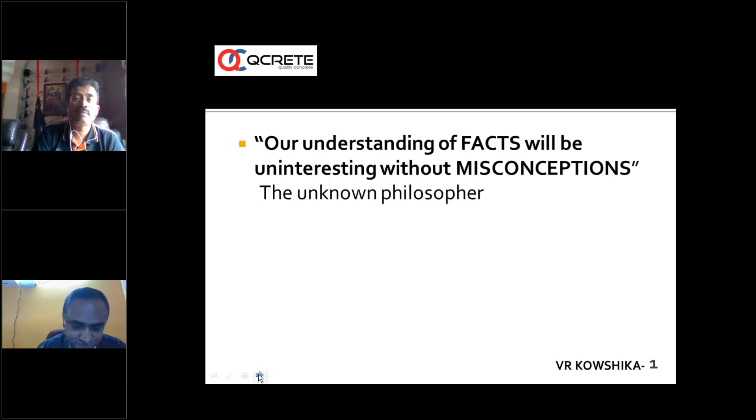Commercial ready-mix concrete started booming in India from 1995 onwards, and some multinational companies came to India also during that period. Even though a German architect patented this ready-mix concrete technology around 1903, almost more than 100 years ago, ready-mix started booming in the UK and Australia starting from the 1930s and 1940s. Still, almost after a century, we have a lot of misconceptions.

And this webinar or lecture is an attempt to talk about those misconceptions and draw the attention of customers and civil engineers who are associated with concrete to the facts.

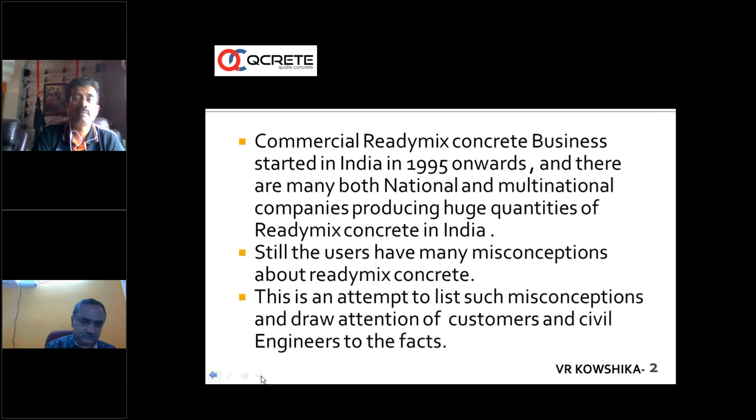So when I was in RMC India around 1999, 2000, at that time also we had all these misconceptions. Unfortunately, many times we hear similar and the same misconceptions, once in a while, before either selection of ready-mix concrete or when a project comes up, we get into these discussions. Sometimes I feel it is unfortunate because a lot of dissemination of knowledge and awareness has been happening through various forums, but still we have to talk again and again on the same subject because the application of the facts and various methodologies which we have described for the last 20 years is still yet to be seen on ground in many cases.

So one of the misconceptions is: I was using conventional concrete and I used to get better strength. This is one of the misconceptions actually.

About 3 weeks ago, there was a call from Mumbai, and the caller identified himself as a 73-year-old man and a professional. He said, Kowshika, what are you doing? I said, I'm working as technical head for this company, Q-Crete Ready-Mix India Limited. Then he said, no, none of the companies in India have done good concrete. They don't supply good concrete, they fall short of quality in many places. I don't believe all this, he said.

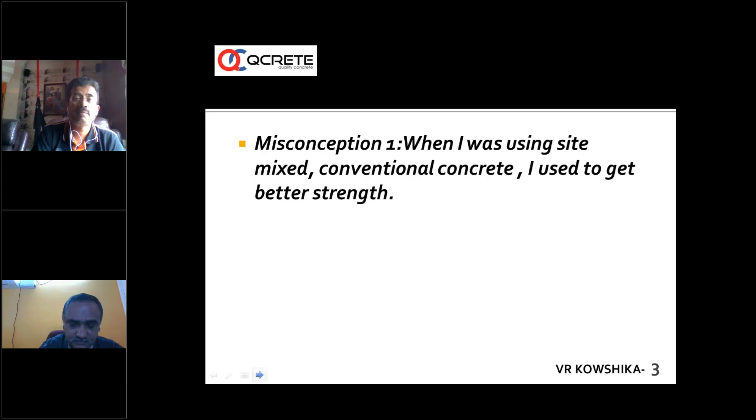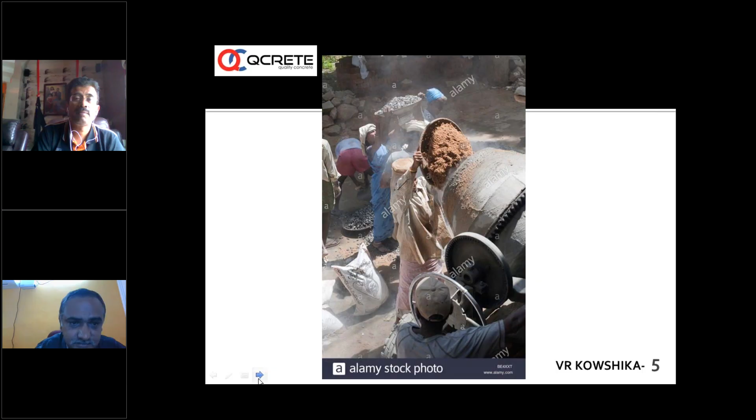The era of site mixed concrete is getting lesser and lesser, even though, as Dr. Manjunath mentioned, there is no proper conversion like in other countries, where about 60 to 70% of cement produced goes into the ready-mix industries, and even plasters and other things are all pre-packed and pre-produced, with assurance coming to the customers. So there is not much site mixing, whether it is ready mix or mortars or whatever.

So engineers and concrete buyers have found ready mix concrete more convenient than site mixed concrete, simply because of the speed at which concrete structures can be built and finished using ready mix concrete. This is the age of speed - everybody is in a race, whether in education, personal life, or whatever way, everybody is racing to do things faster.

In construction too, the speed at which buildings are being built has phenomenally increased. We hear stories of buildings built in China in 24 hours - a 3 or 4 story building, things like that. All this is made possible only with the help of ready-mix concrete, and there is no substitute at this moment that can really match this speed.

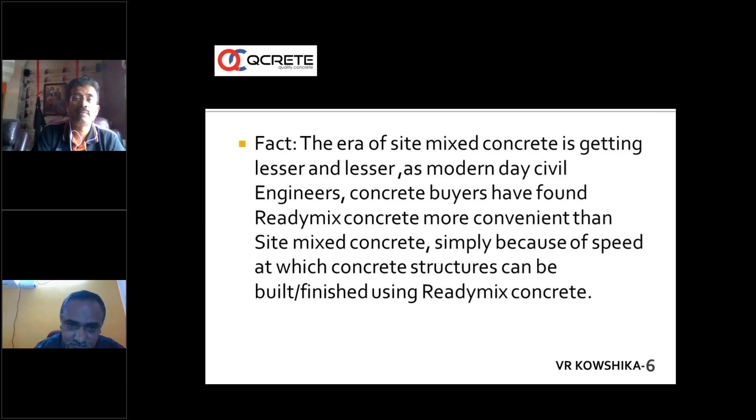Earlier, conventional mixes used to have more cement than required. For example, we used to have M25 at 1:1.5:3 mix, which resulted in approximately 400 kg per cubic meter of cement.

When we were selling admixtures around 91 to 94, it was our primary job to talk to customers about cement saving, how we can save cement by using admixtures. At that time we used to make trials at say 1:1.5:3, which is about 400 kg cement, and bring it down to maybe 340 or 350. That is how we used to establish the cement savings.

At that point of time, PWD, CPWD, and all these agencies used to have specifications like 1.5:3, 1:2:4, things like that. From that point, we have moved a lot, thanks to the ready-mix concrete industry and the booming up of both corporate and non-corporate players.

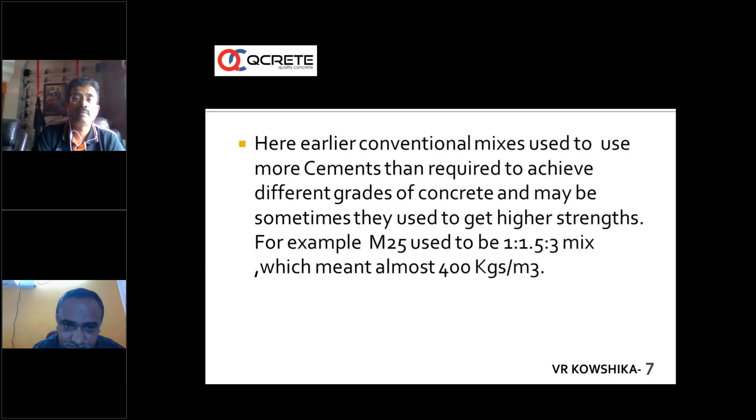Sometimes when the water cement ratio was used correctly - in site mix there is no much control on water cement ratio, it is left to the whims and fancies of the masons adding water - accidentally, by God's grace, when the water cement ratio became okay, even volumetric concrete used to yield higher strengths.

So that was taken as a benchmark, and some people used to say no, we have to consider the importance of material properties like silt content, things like that.

Ultimately, if the concrete quality - all the parameters, strength and slump - came out okay, it was purely probably because some experienced mason was operating the small mixer and adding the water rightly, and the cement content used was more. That is how they used to achieve better quality through site mix.

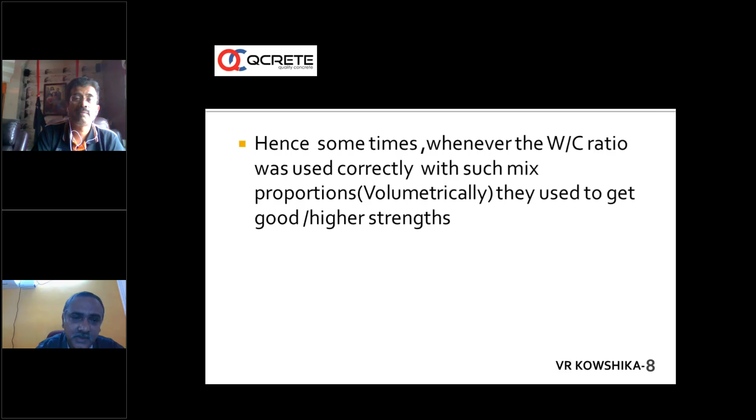Modern cement and mineral admixtures are used in computer-controlled batching plants, making it possible to produce M25 grade concrete today at 320 kg cementitious content, not only cement. Sometimes we use GGBS or fly ash in this mix, and the results give what is required - that strength and properties of concrete. Ready-mix concrete companies give just what is required, what strength and properties are needed.

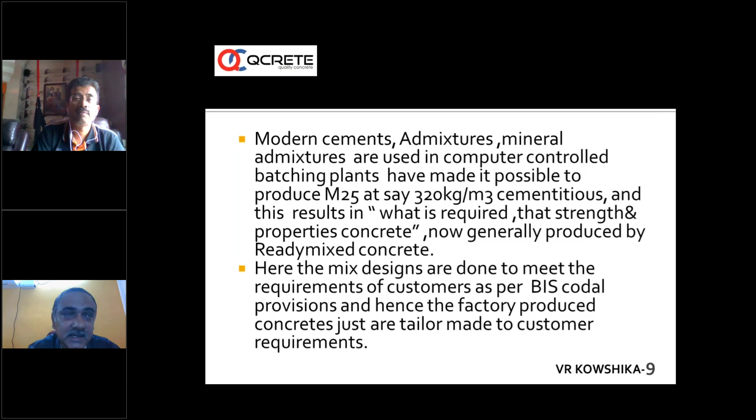Mix designs are done to meet customer requirements as per BIS codal provisions, and hence factory-produced concretes are tailor-made to customer requirements. Customers come up with different requirements - somebody wants early strength, somebody wants 3-day strength, somebody wants different flow properties. Somebody wants SCC, somebody wants highly flowable concrete with conventional admixtures. All these are made possible with automated batching plants where recipes are fed and mix designs are done prior to production, with a greater degree of control exercised.

In short, ready-mix concrete has brought in better quality of concrete and speed of construction - very fast construction, incomparable at many points to site mix concrete. There are no storage hassles, and no throwing around of materials on the road.

In our country, we are fortunate to be here - we can do whatever we want, throw wherever we want, and nobody questions us. But in other countries, throwing up or storing aggregates on the road, stopping traffic with mixers on the road - all this is not allowed. Spilling of either concrete or aggregates on the road is punishable in other countries.

Hence ready-mix concrete is a must in many countries. There's less labor requirement, less wastage of materials, and better life cycle cost of construction because we are enhancing durability by usage of alternative cementitious systems. It's also eco-friendly - we are reducing usage of OPC, incorporating other materials, and hence the overall concrete becomes greener.

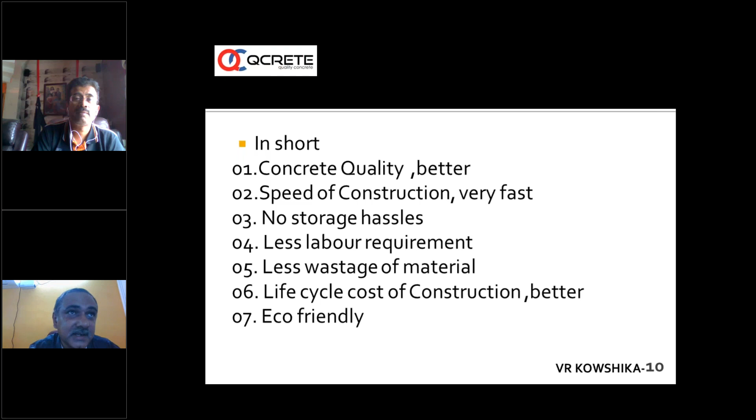So ready-mix concrete as a whole has shifted from larger usage of older kinds of cement - Portland OPC cement - to cementitious systems, where the entire concrete has been pushed to the level of greener and eco-friendly concrete, which cannot be achieved by site mixes.

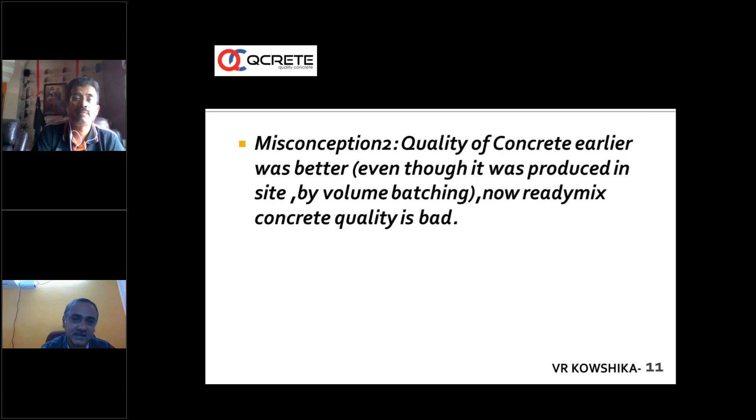The second misconception is that quality of concrete earlier was better. This is an extension of the first misconception - the statement is very subjective. Earlier, site mixed concrete many times had no control of water cement ratio, which we discussed - most importantly, the deciding factor of strength and durability. Water cement ratio is the key, we keep on talking about this.

Also, there was no quality assurance when we were doing site mix. Here in ready-mix concrete, the RMCMA Association, along with Quality Council of India, has come up with third-party audits, with auditors working around the country who certify plants for their capability to produce concrete effectively, complying with the requirements of IS 4926. This certification is given by third-party agencies for ready-mix companies who go through the checklist and maintain all quality management systems in a religious way. That kind of assurance you cannot expect in a site mix situation.

And here is the big difference - any ready-mix company gives the product with complete quality assurance, and many companies, as Dr. Manjunath mentioned, have gone through this process of complete third-party audit. We are certified to produce good quality concrete as per the requirements of IS 4926.

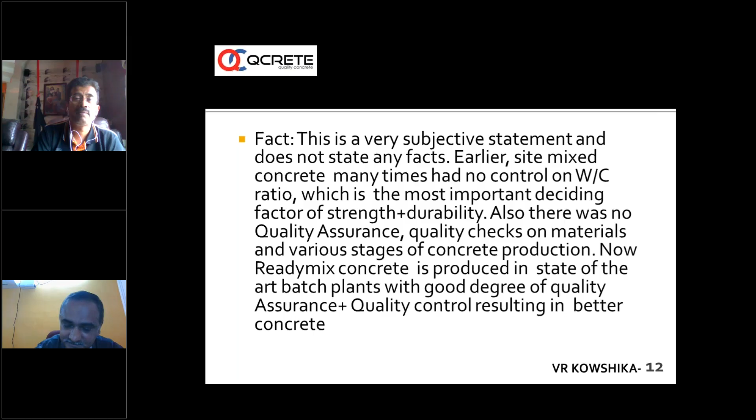Many times, concrete quality suffers or becomes inferior due to inappropriate practices in transporting, placing, finishing, and curing - mostly due to lack of awareness of QA/QC aspects of ready-mix concrete and lack of supervision at sites, even when a good degree of QA/QC aspects are exercised at the production point.

It is not only the producer who is responsible - which is again a misconception. A producer can give the best concrete, but afterwards, other operations in the chain - until delivery and until the concrete is finished - a lot of things can happen.

When we met a good, reputed builder in Bangalore about two months ago and started talking about ready-mix concrete and our company, he said that we can produce good concrete, but what happens afterwards - till the pour starts and after the pouring is over - is 66% his responsibility. He himself told us it is 66%.

33% is your job, 66% is our job, because a lot of things can happen after the concrete leaves the plant and reaches and then gets placed and finished.

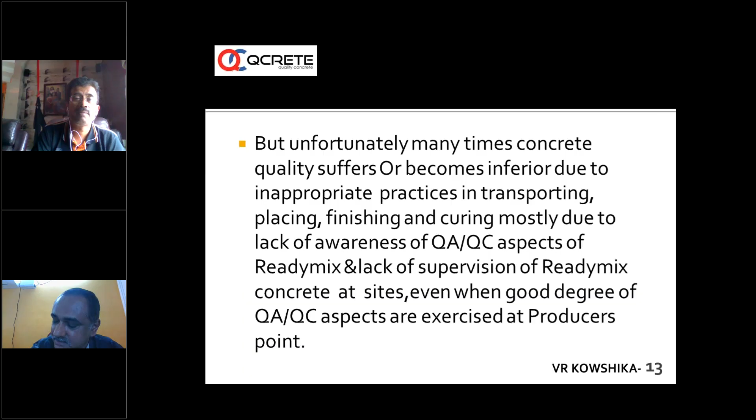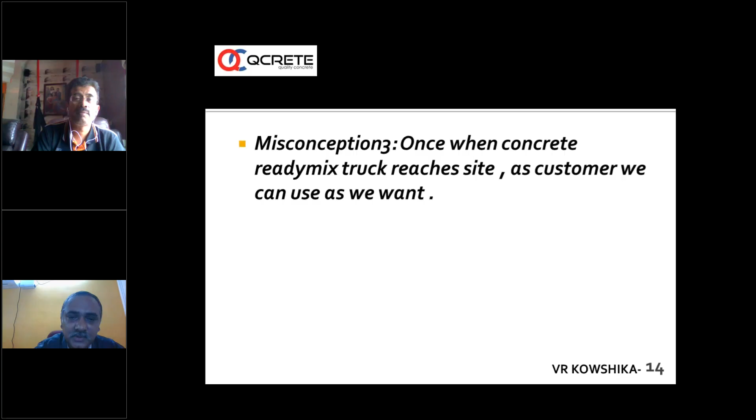The other misconception is that once the concrete truck reaches the site, as a customer, we can use it as we want. Yes, the customer pays for the concrete, but that doesn't mean he can use it as he wants. Before the ready-mix truck reaches site, all preparations must be completed to receive and place the concrete in the intended structures. IS 4926 specifically says that the concrete, once produced, has to be used within 2 hours.

Unless the concrete is produced in winter conditions, or unless it is mixed with superplasticizer or retarder, or a type G admixture which is a superplasticizing and retarding admixture, otherwise you have to use the concrete within 2 hours.

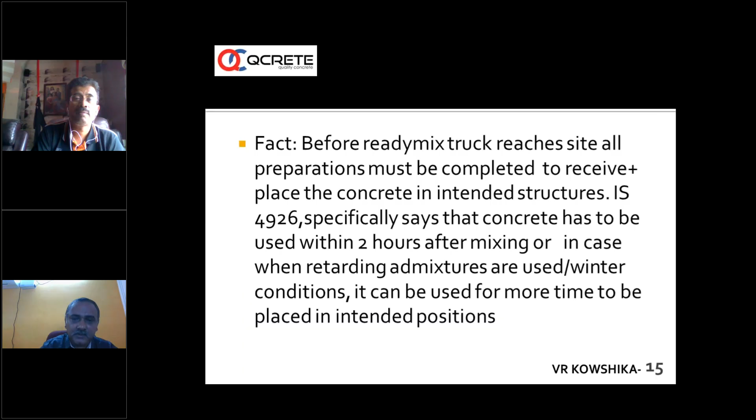So why this particular point has been raised is that quality is a function of time. Quality is a function of time. We can see this with any PCE-based admixture, which is very popularly used now throughout India.

It depends upon so many other external factors like ambient temperature. So it doesn't mean that once the truck reaches the site at 120 mm, 130 mm, or 150 mm, it has the same slump forever. As time passes, within probably 1.5 hours, it will reach a situation where it may become unpumpable.

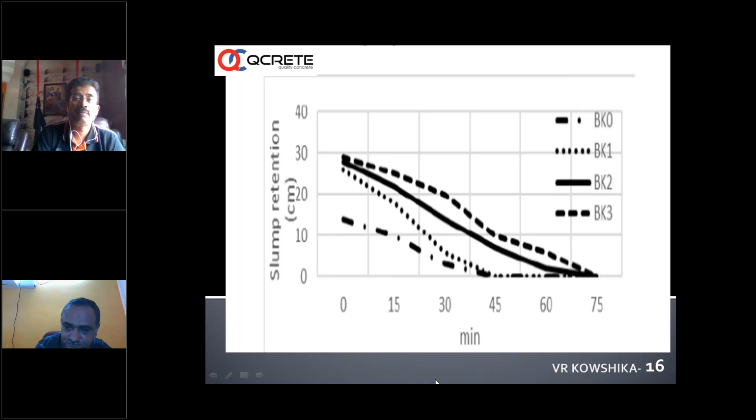So we need to understand that once the truck reaches the site, let us say the ready-mix concrete company has supplied the concrete at the right slump to the site. The responsibility is to use it as quickly as possible. It is the responsibility of the customer to use the ready-mix concrete as quickly as possible, generally not more than 3 to 4 hours maximum, when the concrete includes superplasticizer cum retarder.

Typically, most ready-mix companies use ASTM C494 type G admixture, unless there is clear data showing that with some special admixture methods, concrete slump is maintained for 4 to 5 hours. There was a situation where some trials were done using a strong, high-end PCE-based admixture at a good dosage, where the slump was retained for 4 to 5 hours. This gives an open time of 4 to 5 hours, where after 4.5 to 5 hours we get a slump of about 120 to 130 mm.

So this is a special case. In such special cases, if you want to implement this on site, there should be proper data. A lot of trials have to be done, and then concrete can be used for 4 to 5 hours. Otherwise, we have to limit the usage of concrete, especially for higher grades starting from 30, 35, 40 onwards. It has to be used as early as possible, otherwise the concrete properties become a question mark.

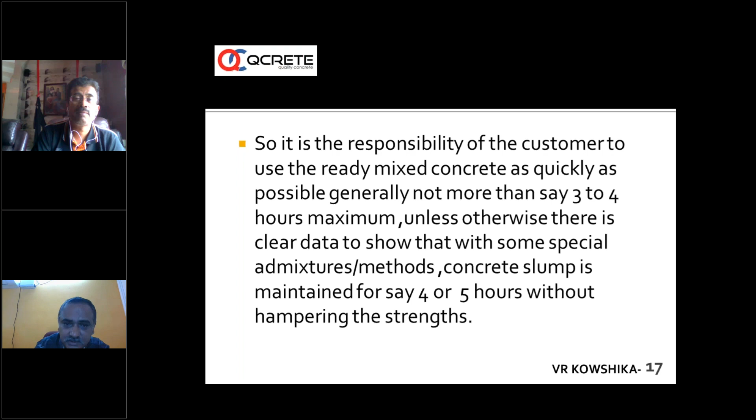What we do many times is try to add admixture on site to boost the slump, which is allowed in IS 4926. Sometimes what happens is the labor or supervisors at site, in the absence of engineers, add water on site, which has to be clearly avoided. In other countries, when I was working with my boss, Marcus Ravensburger, in RMC India, around the year 2000, he used to tell me that in countries like UK, addition of water is allowed at 6 liters per cubic meter to boost or rejuvenate the slump. But we took a decision here that we will not allow addition of water on site because it is uncontrollable and difficult to manage on many sites. So we decided only admixture will be used to rejuvenate the slump.

So boosting the slump on site with a small dosage of admixture is allowed as per IS 4926. A lot of literature and trials have been done around the world supporting this. But there is a misconception - some people don't want to allow addition of admixture on site, and they say the ready-mix company has to supply an exact slump to the site and will not allow any lower slump on site.

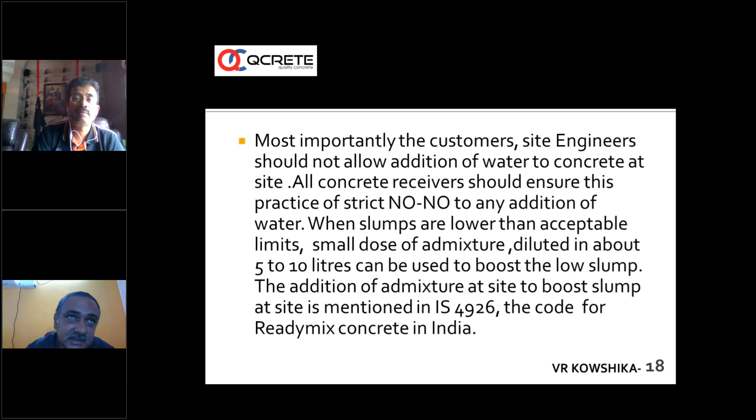As a ready mix company, we do pre-pour inspection and pre-pour site meetings. Any last minute changes, the customer has to inform in advance to postpone the pour - once the truck reaches, he cannot say he is not ready. As per IS 4926, once the truck reaches the site, 30 minutes is allowed for the customer to start pouring the concrete. If beyond 30 minutes the site is not prepared, it is the responsibility of the customer. So customers must be aware of this and there should be 100% preparedness.

I also want to bring attention to the important graph depicting water cement ratio versus strength. When a ready mix company brings concrete - say M50 or M40 - to the site, as we shift the water cement ratio by using more water, if water is added on site, the strength shifts to the right and goes on decreasing. So a concrete producer can produce the concrete with all the best practices, but when the truck reaches site, if the customer adds water, he has easily converted this concrete from, say, M30 or M40 down to M20 or M25 just by adding water.

This is a wrong practice, and it brings a bad name to the ready mix company. Later on, the customer says the ready mix concrete is not good, it is not fit for use, something has happened. All these questions arise because of this misunderstanding or non-implementation of what this graph shows.

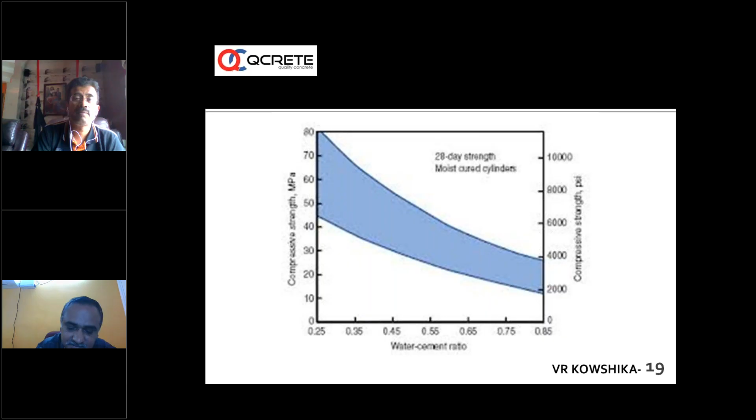When we order ready mix concrete, we get less quantity - this is another misconception which floats around, and we need to understand that mix design is done as per the guidelines of IS 10262. The principles adopted here to implement the mix design are world class.

The best batching plants are used. If we visit UK or any other country and come back to India, the batching plants are of the same standard. We have a standard too, IS 4925. Batching plants are produced with the best quality materials, and the software and everything is up to the mark. Calibration is done in time, everything is okay.

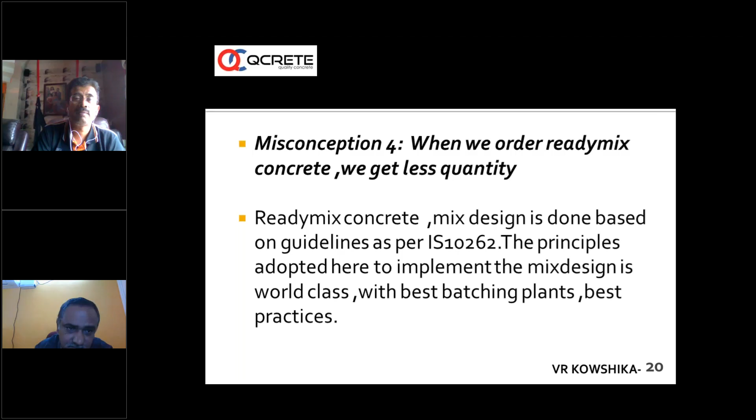In such situations, there is no way that a ready mix company gives a lesser quantity. This is a misconception. In the mix design, ingredients are calculated to give 1 meter cube of concrete.

So in short, what is mix design? It is a method of putting numbers by using specific gravity and other properties of materials, so that the mix, once mixed and produced, will give 1 cubic meter. When everything is done properly with a pre-selected set of materials, it is supposed to give 1 cubic meter once we follow the principles.

The mix is continuously evaluated for actual performance, like yield, daily by the ready mix producer as per IS 1199. The yield is monitored every day. Weights of the batched trucks are taken every day and tallied. The theoretical density and plastic density of the mixes are compared, and the yield is calculated - it has to be between 0.98 to 1.02.

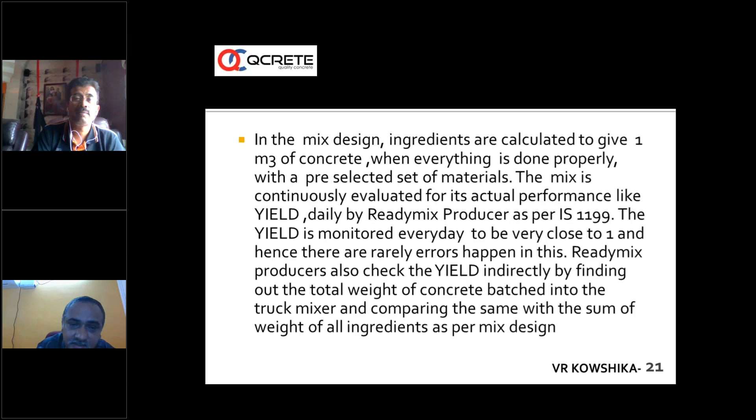These are practices regularly followed by a reputed ready mix company, especially a QCI certified one - unless the calibration of the batching plant has completely failed or not been done, or the set of ingredients considered during design has changed. If lab trials were done during approval with one set of aggregates, and it is changed later for some reason, then only can some changes occur.

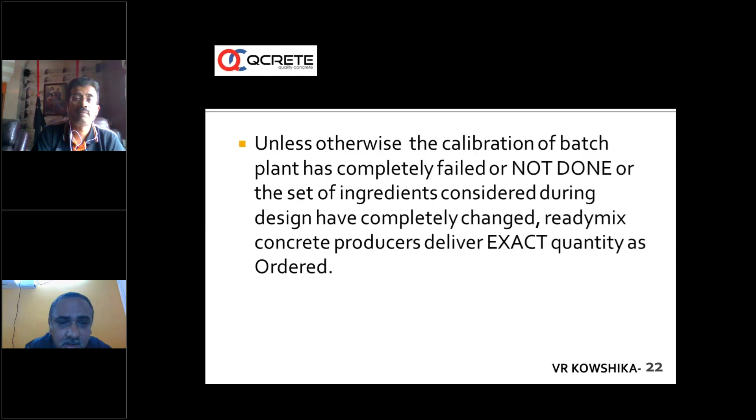Otherwise, ready mix concrete producers deliver the exact quantity as ordered. Variations can occur because of errors in estimation of the actual quantity of concrete - for example, if some chajjas or beams are missed, there may be a difference in the estimated quantity required.

Errors in maintaining thickness are also a very important point. For example, a 10 centimeter thick concrete slab has to be laid at 10 centimeters, but if for some reason it isn't supervised properly and the thickness goes beyond that, a quantity difference will result.

Sometimes this also happens in a big project. If we are supplying concrete for a big project, diversions take place - somebody will be casting a column, somebody a staircase, so they divert the truck, and that is sometimes not recorded. Because of that, the problem of short quantity often comes into picture.

Otherwise, as long as the mix design is okay and we use the same materials selected during the trials, there will not be any variation between the theoretical density and plastic density, and hence the yield will be all right.

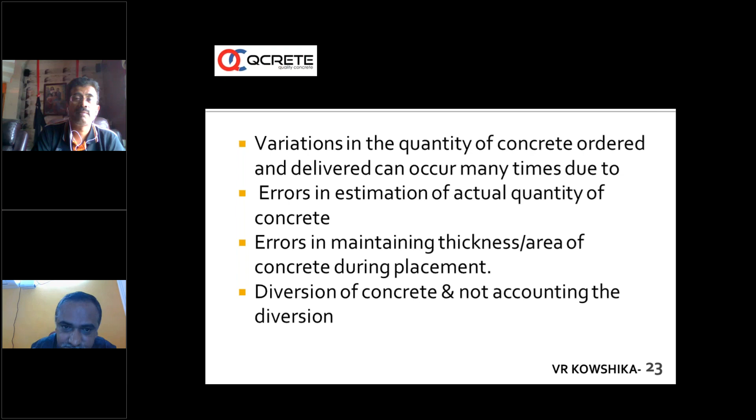Some customers have their own ideas - everybody in this country has expertise in different fields, and many experts are experts in all fields sometimes. So they come up with new ideas, like that we have to do this yield test with a 1 cubic meter box - the concrete producer has to make the concrete and fill up a 1 cubic meter box.

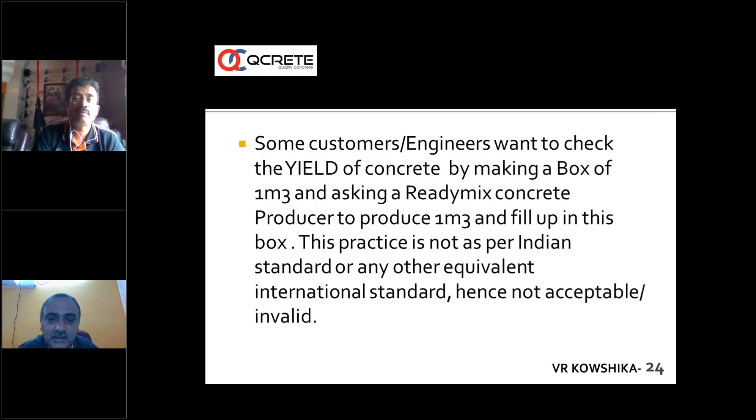But there is no test like this. This is not a valid test. No IS code, at least, talks about this kind of box, so this kind of test is invalid.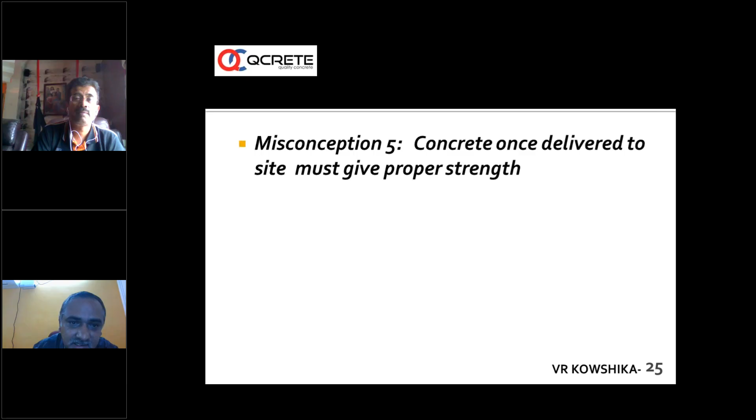But we need to consider other things. Concrete delivered by a ready mix concrete producer will reach the desired potential strength as per intentions only if it is transported, placed, compacted, finished, and cured properly. All these activities after production also have very great importance.

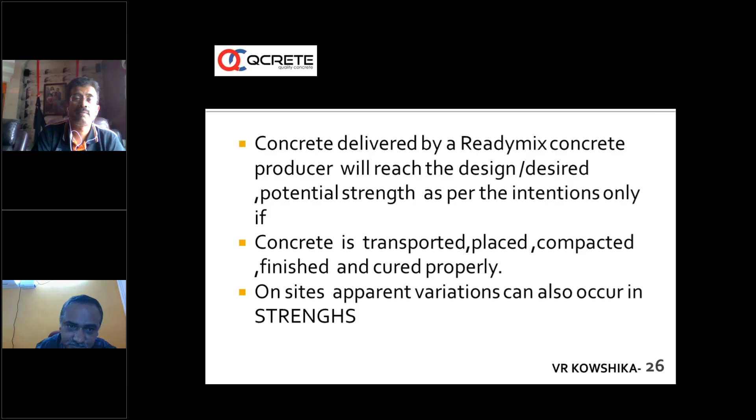And if there is some problem in transportation, placement, compaction, or anything like that, variations can occur instantly. Sampling itself is a neglected area.

So many times the sampling is done as per the whims and fancies of people, either at site or if there is a concrete producer who himself is not aware of a proper sampling procedure, they will also do mistakes, and improper sampling will definitely lead to improper results.

IS 4926 clearly states about the sampling method. We have been talking about this one, and I would like to again and again talk about this, because if the sampling method is not adopted properly, there is no way we can expect the right strength. So these are all apparent strengths. Apparent strength means the concrete may be having proper strength, but because of the sampling, this concrete will show or give a different strength.

So when the truck mixer comes, from the first part you have to leave about 0.3 cubic meters of concrete onto the pump. It should be continuously flowing, and then the concrete sample has to be collected in several scoops. When the concrete is continuously flowing at about equal intervals, it may not be possible exactly to take equal intervals, but approximately equal intervals, we have to collect sample from the concrete which is flowing from the truck chute onto the pump.

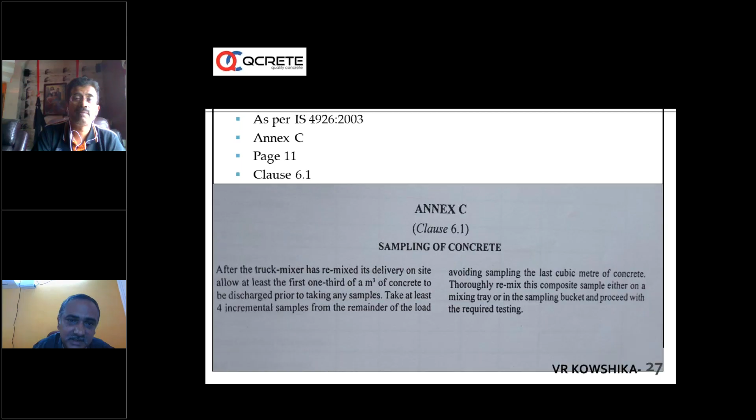So what the other standards say, the other standards like BS 1881, BS EN 12350, all these standards, even ASTM C172, talk in depth about the sampling method.

Here, both ASTM and equivalent BS talk about leaving the first part and last part. So when the truck mixer is about 6 cubic meters, you have to leave the first cubic meter and last cubic meter and take the sample in between. And this is called the standard method.

And in this standard method, the collection of concrete takes place sufficient for making cubes as well as for a slump test. This is also referred to as a composite sample, a composite test. A composite sample will be sufficient to take enough cubes, 3 cubes plus 3 cubes or something like that, and then we can take a slump test.

There is an alternative method which is also called a spot sample, where you can check the workability of concrete. Say, for example, we have a doubt when the customer has a doubt about the slump. So he can take a spot sample, using the alternative method where he will allow 0.3 cubic meters to be discharged, and then he will take scoopfuls in the next 0.3 cubic meters. It is something like the Indian code, IS 4926 method.

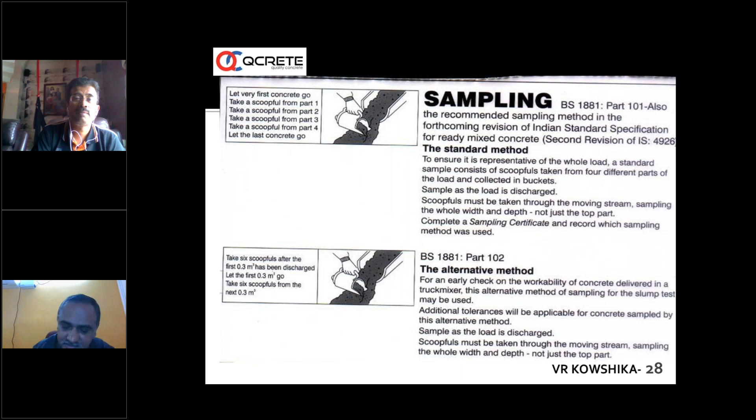Then trained technicians are required. We need to have technicians with us on site who take the samples with proper IS procedure. IS procedure is clearly defined as per IS 1199, how to compact the cubes, 150 mm by 150 mm by 150 mm cubes, 3 layers, 35 strokes each.

And if the person is not trained, he will not cast the cubes properly. So then you will have different results. This graph very clearly says that if the compaction is not done properly, there will be loss of strength. Also, we have other information, which is that each 1% uncompacted concrete will give a loss of about 5 to 6% of strength.

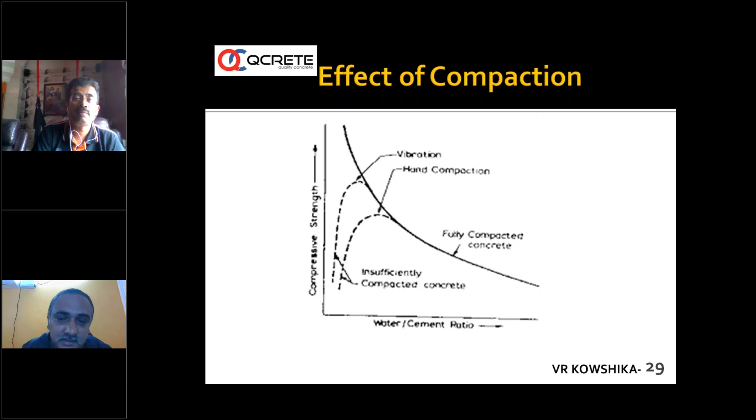So we need to be mindful of the fact that we train the technicians, we train the people who cast the cubes on site regularly, and we don't change. Many sites, what happens is this cube casting is a neglected area. They will go on changing the people who cast the cubes. Okay, and hence it will lead to a lot of problems later on.

We have this famous pictographical representation. A lot of work was done by J.D. Dewar and Anderson, who made this chart showing the effects of different parameters on the strength of concrete. Sampling error gives a plus or minus on the actual strength. Failure to remix sample is important - if we just collect and don't mix the sample, it's a problem. Other issues include distorted cube molds, incomplete compaction, and curing temperature outside the permitted range.

In the last 20 years, many ready-mix companies, forget about the project sites, don't cure concrete cubes at the required 27 plus or minus 2 degrees. They don't ensure the cubes are cured properly on site, and this leads to a lot of discussions, arguments, and disagreements, where people claim everything was done right but the cubes gave different results.

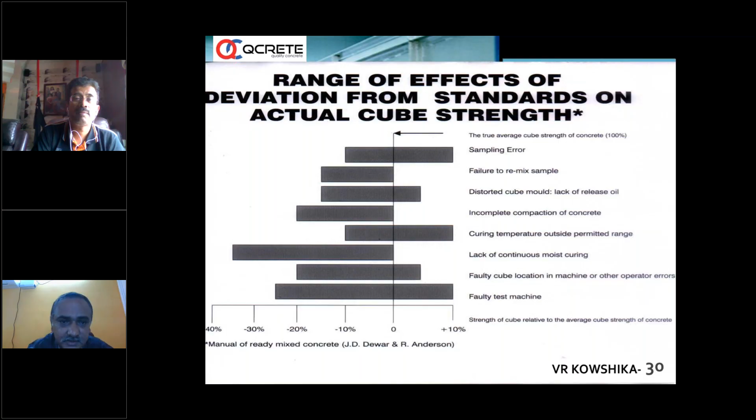To recap: wrong sampling, not mixing the concrete sample, improper casting by untrained technicians, not protecting concrete cubes once cast. If cubes are not protected against sunlight and quick evaporation, and not kept in the curing tank at the right time, we will get problems.

Not curing properly, discontinuous curing, curing water temperature completely out of range as per Indian standard, not cleaning cube molds, not using demolding agent, nonstandard cube molds leading to unacceptable cube size, uncalibrated CTM, and bad practices of testing cubes like not placing them properly or applying the correct rate of loading - all this changes the strength of concrete and leads to different interpretations.

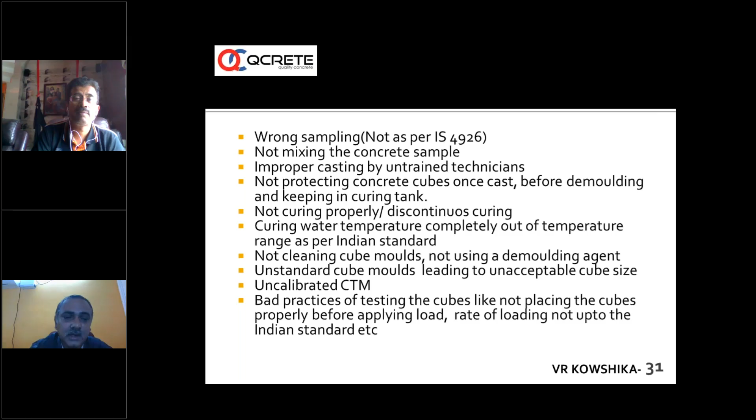Actual concrete strengths on poured concrete can go totally wrong if the concrete is tampered with by addition of water, affecting the water-cement ratio, and due to lack of supervision - especially neglecting quality of concrete during transportation, placing, compacting, finishing, and curing.

We had a case in Hyderabad - I don't want to name the project - in 2009-2010, where the concrete truck with M40 grade concrete had to wait 4 to 5 hours every time it came to the site. We realized later, as the information didn't come in time, that a lot of cube strengths were in question because they had also added a lot of water.

So cores were taken from this particular site - a lot of cores were taken, and ultimately the strength of concrete was proved right, thanks only to the OPC fly ash mixes we had used at that site for M40, because long-term strengths over a period of time had gained more and more, and it had slowly passed the tests.

This was a very classic case of absolute negligence on the part of site supervisors, leading to trucks being kept waiting for more than 4 to 5 hours, that too M40 concrete at hot temperatures - in Hyderabad the temperature was about 40 to 45 degrees at that time - and the trucks waiting for a long time led to disaster. We even understood that the columns were not cured properly, and this led to the problem.

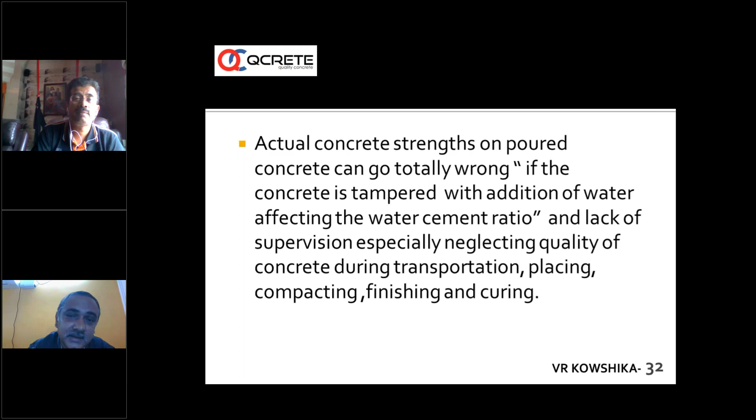Another misconception is that chemical admixtures used by ready-mix concrete companies spoil the concrete.

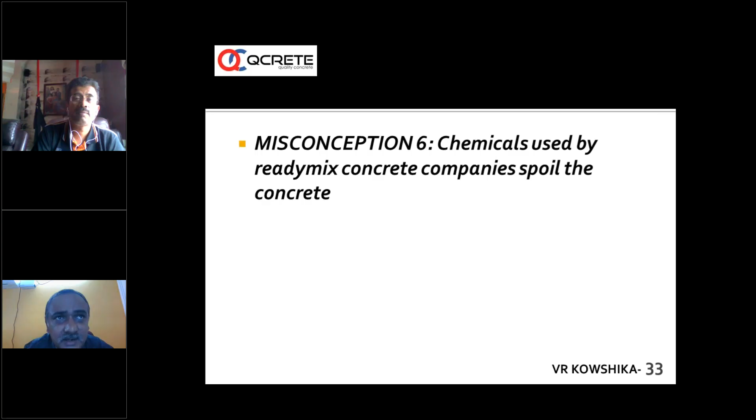Chemical admixtures have a long history. They came into being from the 1930s onwards, where lignosulfonate-based admixtures were first used. Then superplasticizers came into use elsewhere in the 1960s, based on SNF. Then we graduated to the latest invention, fourth generation admixtures, from 1986 onwards, where PC molecules started being used in large quantities for both SCC and normal concrete.

These chemical admixtures, coupled with retarding properties, have made it possible for concrete to be transported and placed even after 3 to 4 hours. They give good fluidity, allow water to be reduced, and strengths are maintained better than non-admixtured concretes. Hence the benefits of chemical admixtures are multifold, and there are a lot of other benefits also.

There are various kinds of chemical admixtures. I can say very clearly that ready-mix companies cannot produce good concrete and transport it for commercial use—say 1.5 hours, 2 hours, 3 hours retention is required—without chemical admixtures. So chemical admixtures are a cost to the ready-mix company; it is not that they just add it for the sake of it. It has a lot of benefits, and without this ingredient we cannot produce and deliver concrete of the right quality to customers. That is the reason we use chemical admixtures.

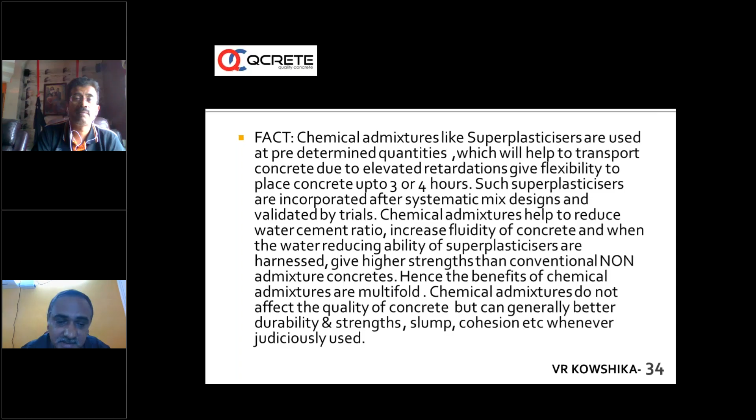Another misconception: ready-mix producers use fly ash, and hence we get bad quality concrete. Some will say ready-mix concrete producers use fly ash, or that you are using GGBS, and hence we don't accept this concrete, we want only OPC. This kind of thing we hear.

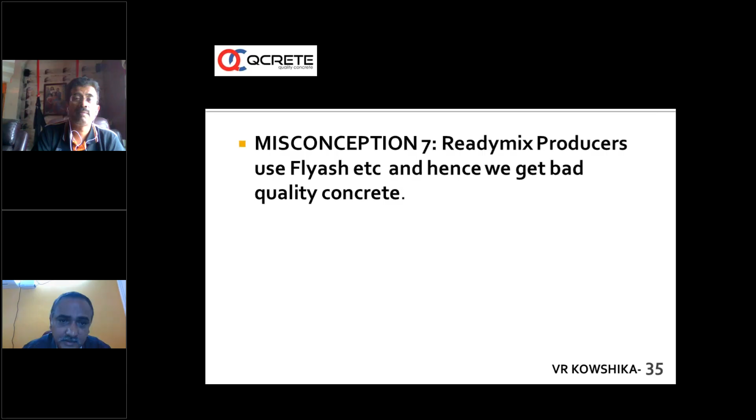Mineral admixtures like fly ash are industrial waste. GGBS is sourced from blast furnace waste of steel plants. These mineral admixtures, when mixed with concrete, participate in secondary hydration, which enhances strength and durability in many ways. There is tons and tons of literature available—it is not new. Romans, not us, started using volcanic ash 2000 years ago. So these mineral admixtures are not new at all.

Earlier, in the year 2000, many reputed companies started using this in hiding—they were not telling customers that they were using fly ash or GGBS. GGBS was not popular at that time; fly ash was being used secretly by some companies. Later on, we graduated to clearly printing on the delivery ticket OPC plus PFA and telling the customer the benefits of PFA usage. We used to bring customers to our laboratory and show them the OPC-PFA mixes and the data.

We showed both 28-day strength and long-term strength data, and that is how OPC-PFA mixes came into being. We have seen in a lot of our long-term studies, RCPT studies and so on, that most durability parameters either remain at the same level compared to OPC or improve. There is better pumpability, finishability, and better long-term strengths, which is one of the most attractive points to a customer.

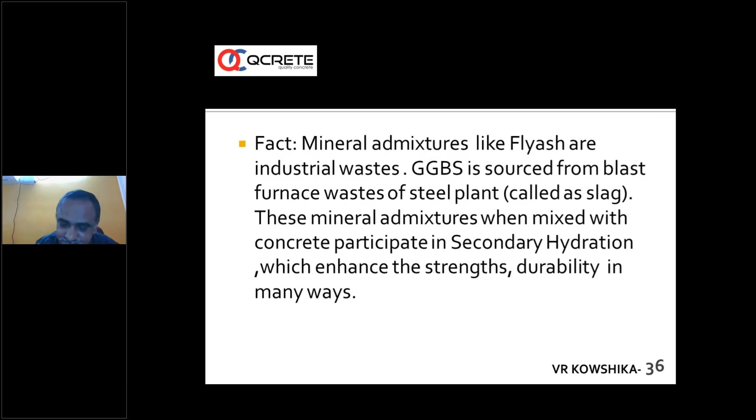The durability of blended concretes is either similar or generally better than OPC mixes. So when ready-mix companies use such industrial byproducts, they give customers better long-term strength and more durable concrete. Considering the overall benefits, they add new dimensions to concrete longevity and render such concretes highly valuable. As I said, easily a customer gets 1 or 2 grades higher.

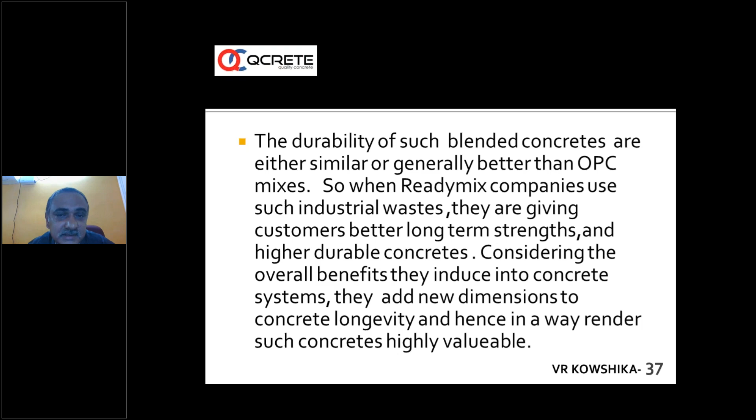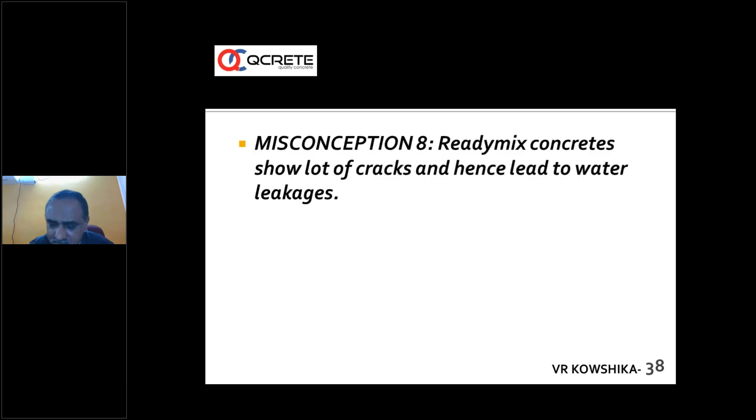One other thing we hear normally is that ready-mix concrete shows a lot of cracks and hence leads to water leakages. Here we need to understand that when we mix concrete, no ready-mix company or concrete producer wants to induce cracks in the body of concrete. It is an inherent property of concrete.

When the temperature is high, wind velocity is high, and humidity is low during placing of concrete, if the evaporation rate exceeds the rate of bleeding, then plastic shrinkage and plastic settlement cracks can occur. When the evaporation rate reaches about 0.5 kg per square meter per hour, especially once it goes above 0.5, there is a tendency to crack, and cracks will surely come if the evaporation rate exceeds 1 kg of water per hour per square meter.

So we have to stop concreting at that stage, or protect the concreting area from heat and wind velocity, and we should have humidity. Otherwise, the unhumid atmosphere sucks the water from the concrete. Whenever something is escaping, something is coming out of the body of concrete, cracks will be shown.

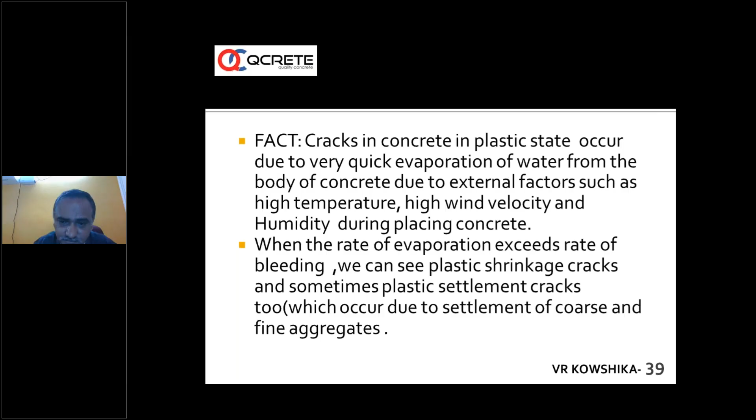So it's like cracks are inseparable from concrete—they are going to happen. We need to handle the cracks. How to handle them, how to reduce them, is the real question.

I always used to tell some of our people in earlier companies that in an organization, you may be doing everything right, but if some people are very egoistic, and if the ego goes beyond the organizational needs, cracks will develop between the company people and the relationship will be spoiled. Similarly, cracks will come in a building if the evaporation rates are high and it is not taken care of.

Many times these are classified as non-structural cracks. However, since open cracks can be pathways for water, oxygen, etc., they can lead to corrosion and possibly reduce the life cycle of the concrete. Hence, these have to be closed as early as possible using polymer-mixed cement slurry or factory-made waterproofing systems like crack fillers.

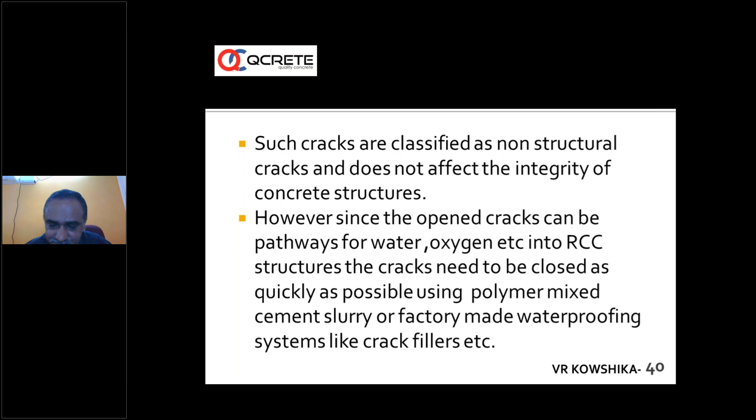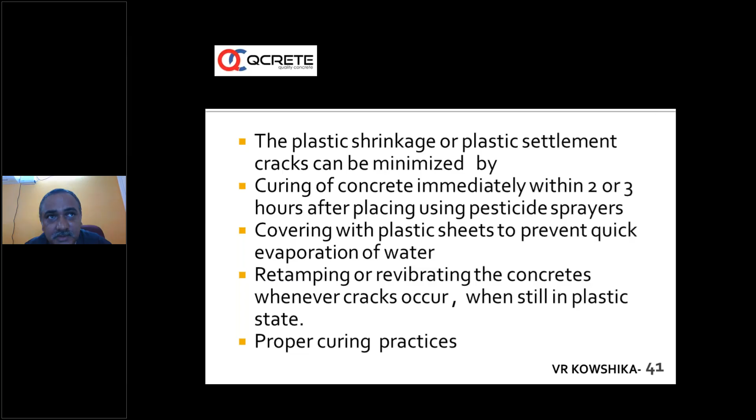Plastic shrinkage or plastic settlement cracks can be minimized by curing concrete immediately, within 2 to 3 hours after placing, using pesticide-type sprayers, covering with plastic sheets to prevent quick evaporation of water, and retamping or revibrating the concrete whenever cracks occur while it is still in a plastic state. Proper curing practices have to be followed. By doing all this, we can reduce or minimize cracks to a great extent.

You also have polypropylene fibers and steel fibers which can be incorporated to reduce plastic shrinkage and plastic settlement cracks. There are other methods like controlling evaporation rates using evaporation reducers, and there are shrinkage-reducing admixtures which can help reduce shrinkage and cracks. We should also take care that concrete placing is done at lower temperatures and wind velocities.

Generally, we used to recommend in climates where the temperatures are high, like in Chennai, we used to tell customers to do concreting in the evening when temperatures are low. When I was working in Oman and Saudi Arabia, we used to tell them don't do concreting when the ambient temperature is above 38 to 40 degrees. We used to tell them either do it before 11 o'clock in the morning, or do the concreting in the evening, especially the big pours.

And of course, in these countries, they used to use a lot of ice and chilled water to control the initial temperature of concrete until the pouring is done. There used to be a specified temperature of concrete at the point of placing.

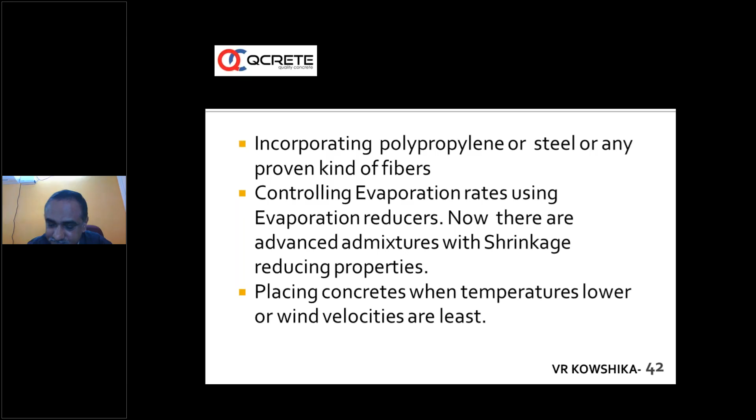There are no crack-free concretes guaranteed by any ready-mix companies, we need to understand. Also, ready-mix producers cannot supply 100% waterproof concrete. So let us say somebody orders M30 or M25 concrete - is it the responsibility of the concrete producer to give 100% waterproof concrete? If that is the case, then why would waterproofing systems exist? A lot of companies supply waterproofing chemicals across India, and across the world.

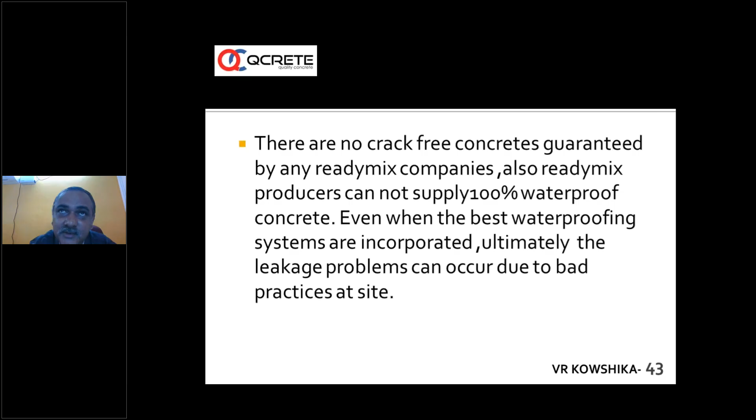Concrete can be produced as per the grade, as per the slump, as per the consistency required by the customer, but it doesn't come with a crack-free guarantee or waterproofness. Concrete, as it is, is not waterproof. Even if you incorporate waterproofing admixtures, waterproofing materials, even if you do waterproofing treatment also, many other things can happen on site which will not give 100% waterproofing. So it is not the responsibility of the concrete producer to take care of the waterproofing aspect or cracks aspect. It is a combined activity which has to be done, and site supervision is of paramount importance.

We have another misconception where many people across India, even now, believe that river sand only has to be used and manufactured sand should not be used. This manufactured sand came into being, or this word was coined, in the early 2000s, where the stone crushing industry started using VSI, vertical shaft impact crushers, where they started sieving and using some methodology of even washing the sand, and started giving what is called manufactured sand. Earlier also, in IS 383 1970, crushed stone sand is mentioned.

So as long as the crushed stone sand, which is a byproduct of the stone industry, meets the requirements of IS 383 1970, both in terms of grading and any other properties mentioned there, there is no problem in using this. There was also a lot of reports, one by Professor Venkatarama Reddy of Indian Institute of Science, where he did a lot of studies on the usage of manufactured sand or crushed stone sand, and published his findings, stating that manufactured sand can be used for all construction purposes, including plastering.

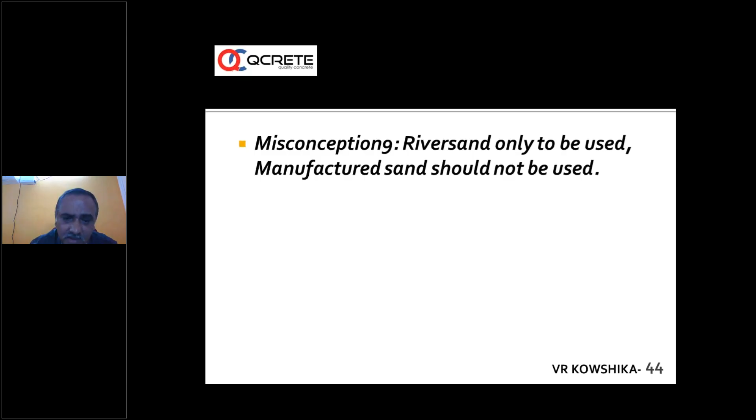As long as it meets the requirements of IS code provisions, we can use it, and we have done a lot of trials. The only problem with manufactured sand many times is if it has excess fines below 150 microns - IS 383 specifies that 150 microns content should not be more than 20%. So if there is negligence on the manufacturer's part and he produces and sells sand with more fines than specified, and ready-mix companies use such sands, the water demand goes up very high, and you will have problems in both fresh state and hardened state. As long as we are careful about this, there is no problem using manufactured sand.

The basic difference between river sand and manufactured sand is in its shape and texture. River sand, because of weathering and because it travels along the water for a long time, maintains the sphericity of particles. The particles are spherical and many times it has good grading. Whereas manufactured sand or crushed stone sand will not have that kind of spherical nature.

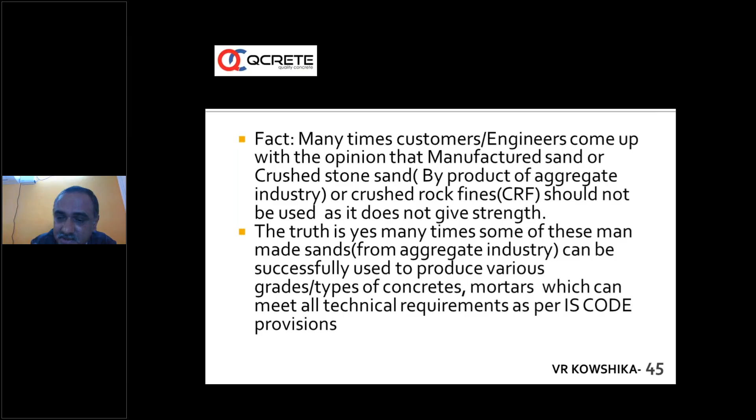A lot of restrictions have been placed on collecting natural sand from riverbeds. The manufactured sand has become a perfect replacement, completely replacing river sand in many areas of India, and partial replacement of river sand is also done in many other areas.

Tons and tons of these materials are used not only for the construction and concrete industry, but also for manufacturing glass, using river sand. So the entire flora and fauna along the river bed is affected, and we have a lot of other problems across the globe by using this natural sand. It is not a material which is going to last forever.

So we need to be careful and responsible, and then move easily to the other alternative, which is manufactured sand.

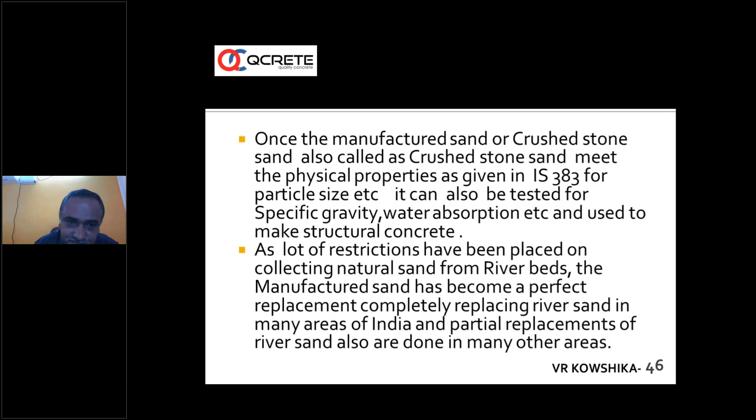Sometimes the fines passing through 150 microns and 75 microns seem to fall out of the range of IS 383. That kind of sand should preferably be avoided. This is the challenge for QA/QC engineers on site, and this is the real challenge for concrete producers, who have to be careful about this.

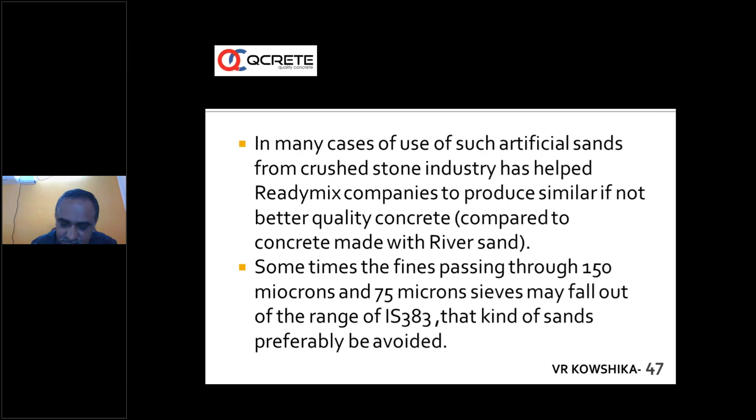The increased surface area due to fines content going up, because of the shift from river sand to crushed stone sand, is managed by reducing the water cement ratio with the use of improved PC-based high performance superplasticizer. In short, river sand has been successfully replaced by manufactured sand from the aggregate industry.

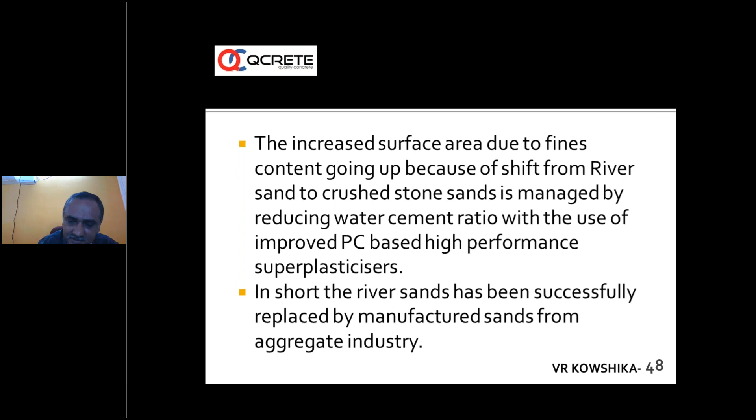This is a very important misconception which many people have, and many are under the impression that it is very easy to achieve. So just as one of the incidents, I want to quote this.

About 4 years back, a rich man with about 8 or 10 bars and restaurants in Bangalore started talking to me. He said, sir, can we have a ready mix company? Yes, I said, we can have a ready mix company, and for you it will make a very good combination, I told him.

So what do you mean, he asked. See, what happens is, if the salespeople of your ready mix plant are selling a good amount of concrete, they can always sit in your bar and restaurant and enjoy, celebrate. On the other hand, if something goes wrong and they are not able to sell, then when you blast them for non-performance, they can also sit in the bar and enjoy the sad moments. So he was baffled by my answer.

Then I told him, see, it is not the question of money that you have or can bring in. It is the question of whether you are committed to quality, whether you are interested in appointing good people on board. The quality control aspect is the most important aspect. What is the difference between one ready mix company and another?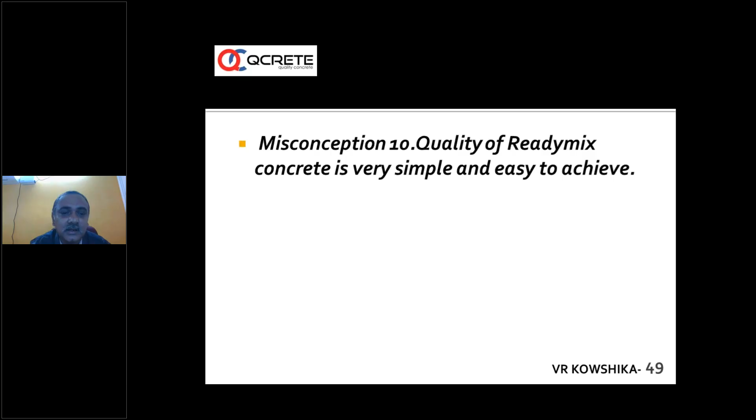Here, concrete is a complicated subject, with many different ingredients and an inbuilt degree of variability. We are trying to create a finished product of reasonable quality, meeting all the requirements of Indian standards.

This is achieved with complete attention on QA/QC, three different aspects: forward control, the set of all activities before production; intermediate control, activities and controls at the point of production; and retrospective control, the set of all activities done after production. These are the three pillars of QA/QC systems in a ready-mix company.

This is mentioned in IS 4926 also. It is not easy actually. Each of these pillars has a lot of other activities, starting from selection of materials, mix design, testing of materials as per frequency, both internal and external testing, and it has to be followed by good intermediate control and retrospective control also.

So it is not a simple thing to make consistently good concrete even with a modern batching plant made as per IS 4925. It is not easy unless you have all the quality control systems in place, and trained professional people on board in the quality control department. It is not an easy job.

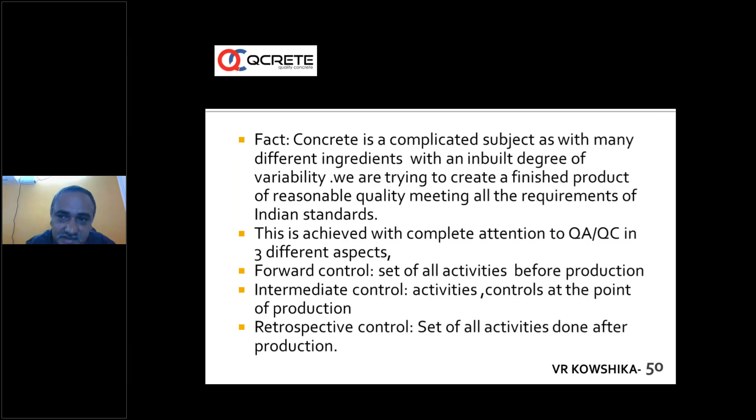QA/QC staff of a ready-mix concrete company continuously struggle to achieve the best quality. Let me give an example. About 3 years back, in my previous company, we had a complaint of low strengths in a ready-mix company. So when we started investigating,

the OPC GGBS mixes were giving very low 7-day strengths. So when we gave the cement sample to 4 or 5 laboratories, we came to know that the fineness was at least 15 to 20% lesser than the MTCs given by the cement producer. The MTC given by the cement producer stated about 320 meter square per kg, whereas what we found in various labs, 4 samples given to 4 different labs, was giving 260, 280, 270 - lesser fineness of cement.

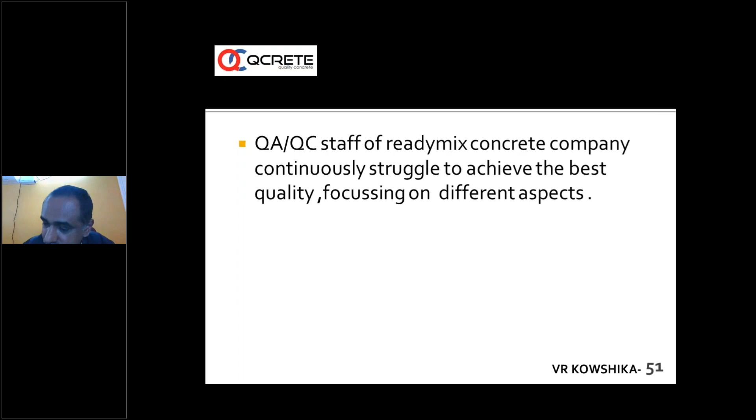This was the same brand of cement the person was using for 4 or 5 years. So the reactivity was lower, 7-day strengths were lower. Ultimately he got the 28-day strength - that's a different matter - but the customers started jumping, started panicking actually. So it is a challenge on a day-to-day basis when there are a lot of inconsistent materials.

Sand coming with different fineness, cementitious materials coming with different fineness and properties, same brand of cement coming from different plants with different properties. So it becomes a day-to-day challenge for a ready-mix producer, especially the QA/QC engineer. He has to be working 24/7 looking at all these materials, completely trained and aware of minor or major changes in the ingredients of concrete. That is a big challenge for a ready-mix producer. Unless people are committed and well trained, quality control in a ready-mix company is not easy.

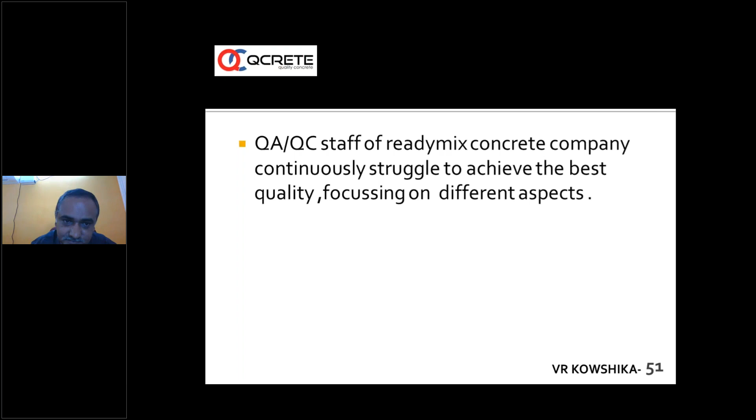There is another misconception we many times encounter. The customer starts talking about the mix design and tells us what to use. It's like going to a hotel and asking the chef to bring the atta and do as we want. Will he do that? Actually he will not do that - that is a different matter.

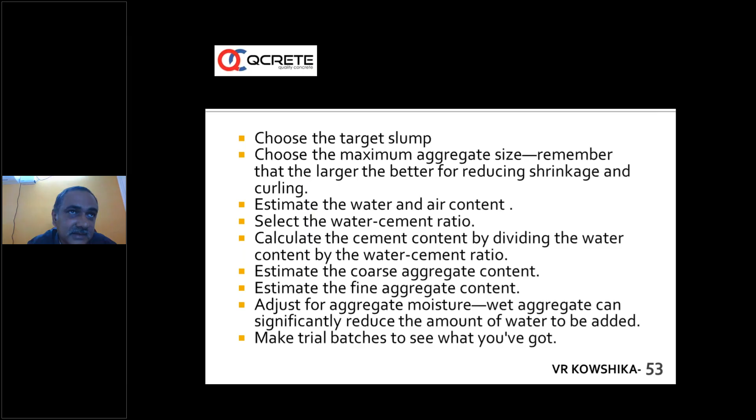When we talk about mix design, any qualified, QCI certified ready-mix company has the capability to do the mix design. They choose the target slump, choose the maximum aggregate size, estimate water and air content, select water-cement ratio, calculate cement content, estimate coarse aggregate content and fine aggregate content. All this is done, and they know how to do it.

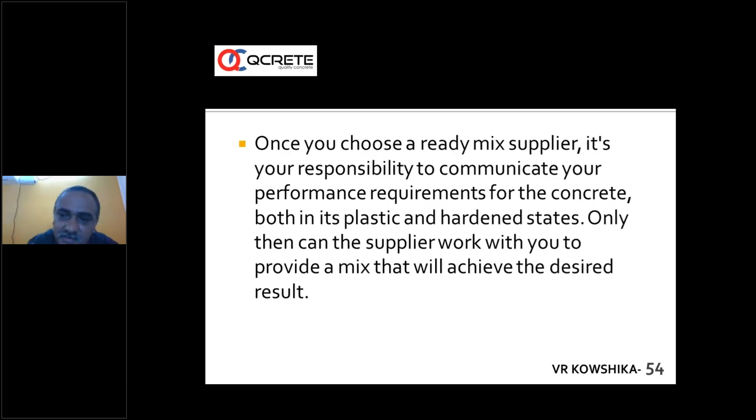Once you choose a ready-mix supplier, it is your responsibility to communicate your performance requirements. We need to tell the customer what is required both in plastic and hardened state. Only then can the supplier work with you to provide the mix that achieves the desired result. You should know the fundamentals of concrete mix design as a customer, but it is best to leave the exact proportions to your ready-mix producer.

It is very important as a customer to leave the mix design part to the producer, because the QA/QC in-charge of a ready-mix company, with maybe 20, 15 or 5 years of experience, is daily using the ingredients and knows what to do - what material to use, what dosage of admixture, what brand of cement to use to get the best properties, best slump retention and best strength.

Other countries, preferably many countries, leave this more to the ready mix producer, but many times we find customers defining all this. It ties the hands and legs of the ready mix companies, and many times it puts the ready mix company into a spot. Actually, many problems we face because of this kind of prescription given by the customers.

A reputable supplier will welcome your feedback. If you give feedback on mix design, anything, a ready mix company will welcome it. We modify the mix to meet your needs. In some cases, even slight modifications can make a big difference. That is also very important. Feedback of customers on these things is also important.

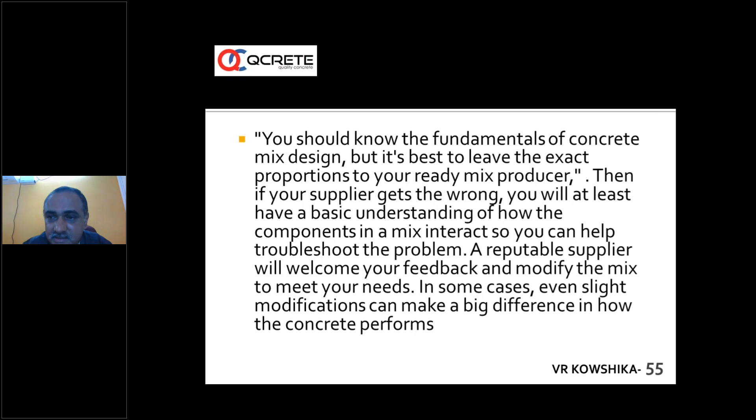Misconception on number of samples, sampling, etc. So we have a lot of misconceptions on how to take samples, how many samples have to be taken, and things like that. We have talked already about how the sampling method is defined not only in the Indian code but other codes also.

Rate of sampling as per IS 4926 is very important. It very clearly states one sample for every 50 cubic meter of production or every 50 batches, whichever is greater. When you are doing site mix concrete or volumetric batching, earlier people used to refer to IS 456 for this. There is no need for reference to IS 456 here, that is our opinion. We can go directly to IS 4926, where it talks about minimum sampling for every 50 meter cube or 50 batches, whichever is greater, one sample has to be taken.

So what is one sample? One sample is 3 test specimens at 28 days. If extra is required, somebody wants 7 days, somebody wants 3 days, somebody wants 1 day, that is all extra cubes, and this has to be agreed upon in a bigger project. But normal projects, the normal accepted practice throughout India is 3 cubes for 7 days, 3 cubes for 28 days, for every 50 cubic meters.

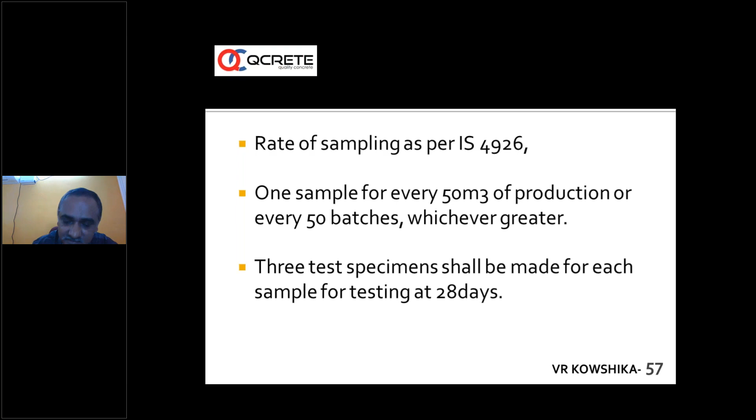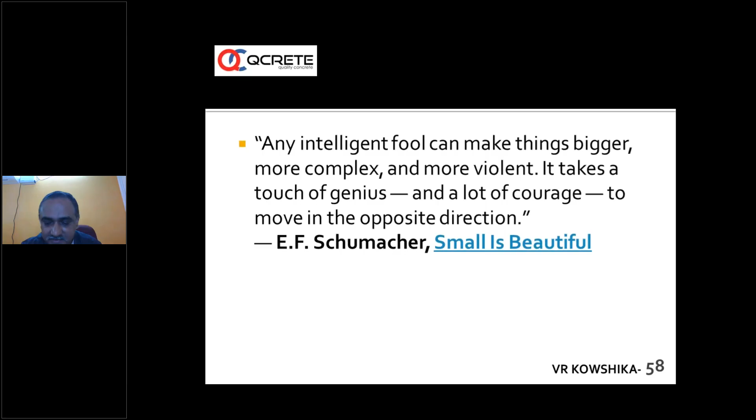The absolute today may become tomorrow's oblivion. So what we think today as the fact may become a false statement later on. Earlier, for example, 30 years back, if somebody in concrete used to tell there will be concrete after 30 or 40 years where you don't need compaction, no need to use vibrator, somebody would have laughed actually. Okay, so today we are seeing SCC concrete being used throughout the world. So the absolute today may become tomorrow's oblivion.